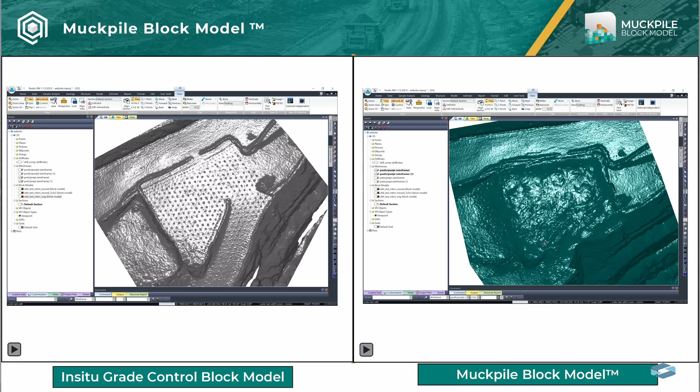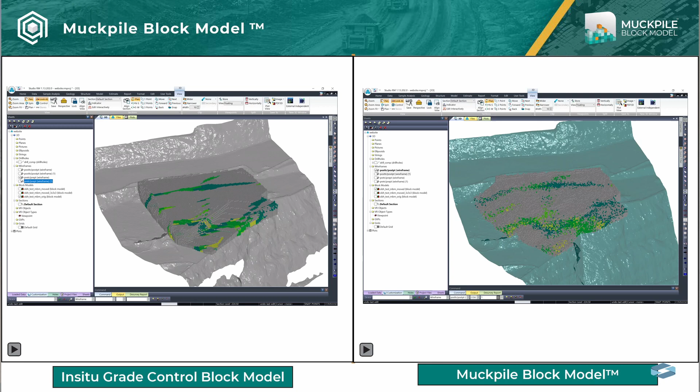If that's not immediately apparent what it is, you can see we've got two surfaces that we use. One of the pre-blast, which is the video playing now, and we use that pre-blast surface to slice your grade control model. So that slice of the grade control model, you can see, becomes a nice little basis of your grade control platform, and we subcell that to a cubic meter scale. So the surface of the post-blast arena, now you can see, also has a block model that fits perfectly to it, but none of those blocks are new. Every block in that post-blast Muckpile block model has come from your in-situ grade control model.

All our solution does is relocate cubic meter blocks in space. So you have a flawless balance of tons and grade in the Muckpile block model to what you had in situ. And because it's based on the surfaces, it's actually a very accurate volume estimation, shaving away 1% errors every place that we can. And as you can see in the last graphic, the Muckpile block model at a cubic meter resolution was too much precision to mine from. So we have reblocked that up into an SMU scale.

So it was really interesting, Dave Berry, talking about your Python functions. We would love a ton grade analysis here of not only what you had before the blast, so you can see the plan, but because the Muckpile block model helps you understand dilution, doing a grade tonnage curve and comparing the two curves is a really insightful activity that we do quite often. And the reblocking is a Python function we could look at open sourcing for you, seeing as you're missing that in your library. So with a quick introduction to the Muckpile block model, I'd love to hand over to Cael, our product owner, to walk you through a value application.

There you go, Cael. Excellent. Thanks for the layup, Bryce. That was a good introduction.

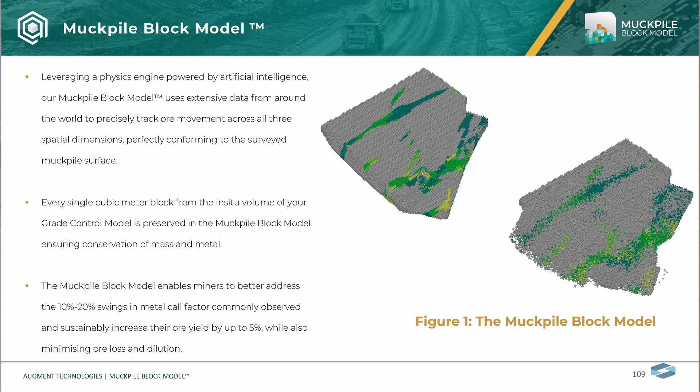So what this allows miners to do is to better address the 10 to 20% swings in metal call factor that we see when we do a reconciliation study. You often see a bit of a sawtooth sort of pattern. It's probably the topic for another talk, but there are many error bars in a reconciliation study that I'm sure we can all appreciate. But one of them is definitely ore loss and dilution, of course.

And so using the Muckpile Block Model enables our customers to realise an increase of ore yield by up to 5% sustainably, while also minimising the short-term variations in reconciliation.

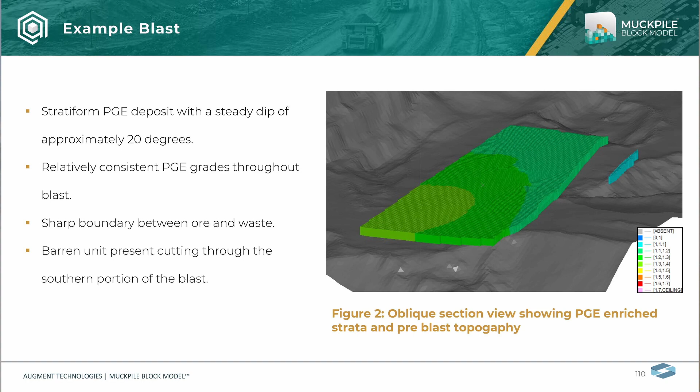So let's jump into the blast. We've got here a stratiform PGE deposit with a steady dip of approximately 20 degrees or so. Here I've just got the block model. It's the in-situ model that's been filtered to remove the waste. And you can see that there's relatively consistent PGE grades throughout. This particular part of the mine's high grade, and so essentially all the blocks here sit in the high grade material type. And there's a sharp boundary between the ore and waste, of course, for this type of deposit. This is a visual deposit, so you can see it in the pit.

And the next step of the process is to import our drill and blast data. And so what we're looking at here is a simple square pattern with echelon blast timing. We have a consistent drill spacing and burden. There's a few more holes on the free face, but what we're actually displaying here is the timing values.

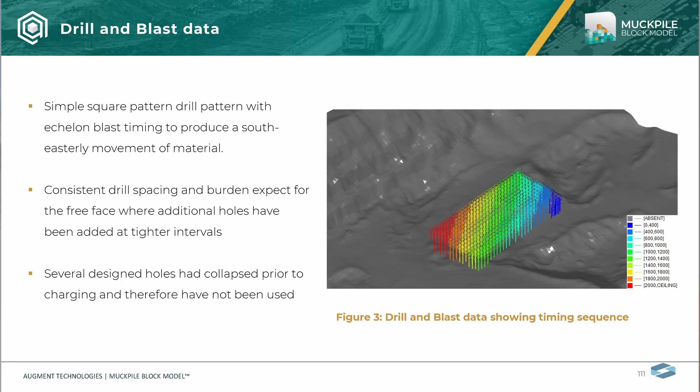And I find this is a really intuitive way of trying to set the expectations in your mind of what the blast movement's going to be like, because we know that blast movement happens at a right angle to our timing contours. And so we've got low timing values on the right, high timing values on the left. So we would expect blast movement to go from the left to the right-hand side of the screen.

Importantly, as I mentioned earlier, with regard to actuals, we do have several designed holes that have collapsed in this blast. So I just wanted to underscore the importance of using actuals, because it will have a demonstrable effect on the Muckpile Block Model at the end.

So we've just imported all the data, the user's created the strings, and the regularization process has happened. It's been sent to the cloud and returned. On a blast of this particular size, that process should take somewhere around 15 to 20 minutes. It does scale with the size of the blast.

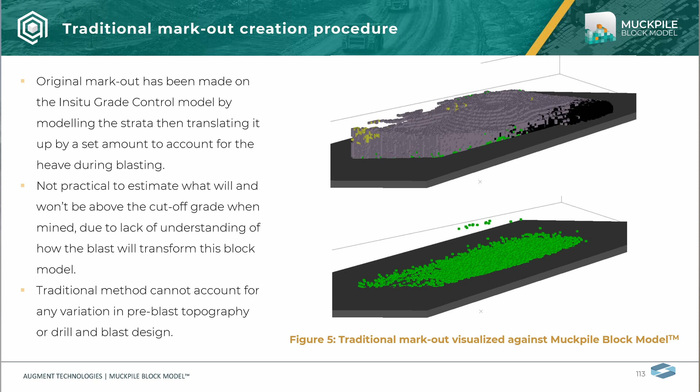But you can see that we've got some material that's hanging out on top of the markout there. And you'll also note that that material has a topography of its own. It has like a post-blast ore topography, if you will. And it's quite complex. If only we had some way of measuring it. Well, like I mentioned, it is a visual ore body, so we can send ore spotters into the pit and we can have a look at what the post-blast environment looks like.

And that's where the problem comes in for this kind of ore body geometry: how do you create a markout around that kind of geometry? But before we go there, we've got some ore spotting data. How does that compare to the Muckpile Block Model? And does the Muckpile Block Model represent that same complexity that I was saying is causing so many issues?

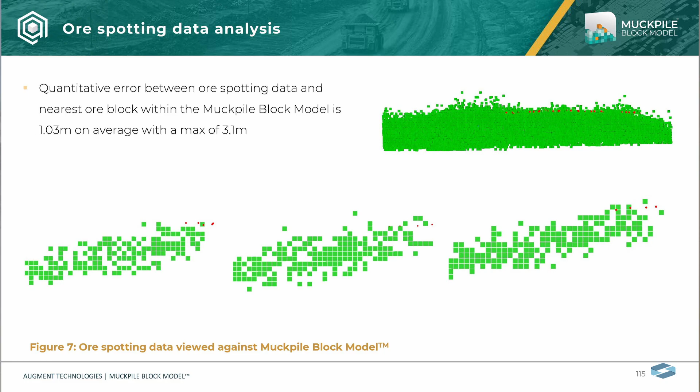And you can see for the parts where we do have those samples, there is generally a good agreement. You do find a block here or there that is above, and you do find a block here or there that is below. But in general, if we take a quantitative approach, which is always the best, we have approximately a 1 meter error on average between our ore spotting data and the nearest ore block as calculated by the Muckpile Block Model. And there is a max error of about 3 meters. But generally, we would consider that to be a good agreement between the two data sets.

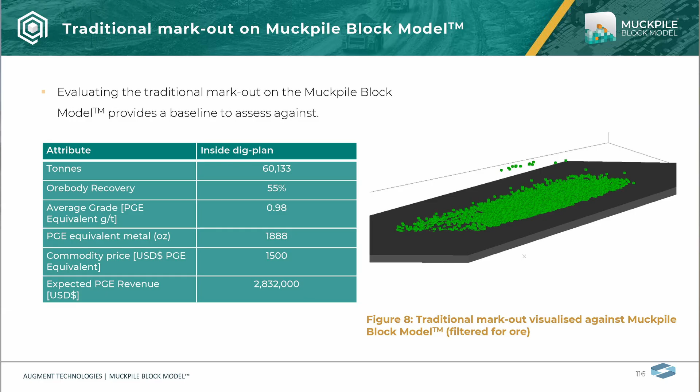So now that we've got our Muckpile Block Model, we can evaluate the traditional markout and see how much of that blast, which effectively all sat in the high-grade bin to begin with, has been recovered in that markout process. And in this instance, using the traditional one, we have approximately 55% of that ore being caught in that markout, which still gives us a very healthy revenue figure that's going to be brought forward immediately, because we all know that high grade makes its way to the mill first. But we are still leaving a lot on the table.

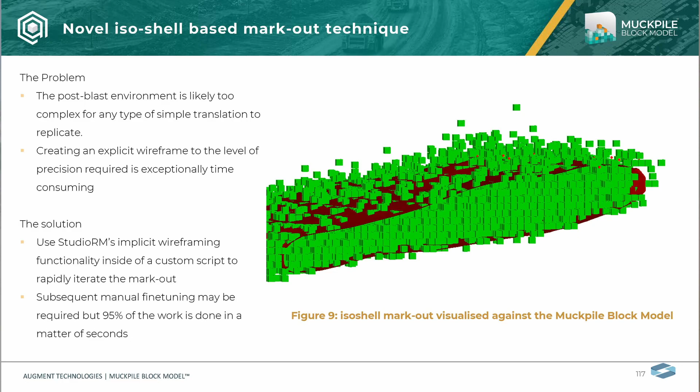But as we've already sort of mentioned, there's a complexity to this system that is really hard to capture with just any sort of simple translation of a wireframe or indeed a string. The ore body geometry is quite difficult to replicate. So what can we do that's different? We decided that we'd try a novel isoshell markout technique. So just to reiterate the problem, creating an explicit wireframe to this level of detail would be exceptionally time consuming and not a real good use of a geologist's time.

So the solution that we came up with, as I mentioned, is to run StudioRM's implicit wireframing functionality inside of a custom script that we created, which enables the user or the geologist to rapidly iterate the parameters that get input into that wireframing process to evaluate the tons and grade in each of those scenarios. So if you needed to put the most amount of tons through the mill at a given grade, like a cutoff, you could evaluate that scenario. Or if you were tons constrained and you needed to have the highest grade possible given a set amount of tons that you could put through the mill, you could evaluate that scenario.

Using the Muckpile Block Model in this way gives you the optionality to essentially evaluate whatever paradigm you're in. And also, it's critical that this process is only really possible because it is in a block model where you can store these values as points and wrap an implicit wireframe around it. So it's very powerful to have it in proper block model format. Now, subsequent manual wireframing and fine-tuning is probably required, but you've eliminated 95% of the legwork, and what would probably take upwards of an hour to do explicitly, you've taken down to a matter of seconds.

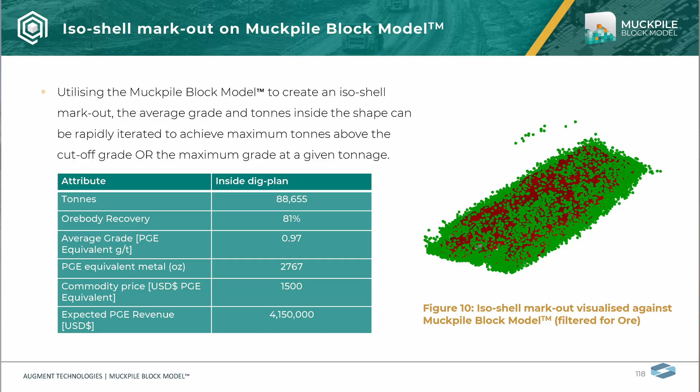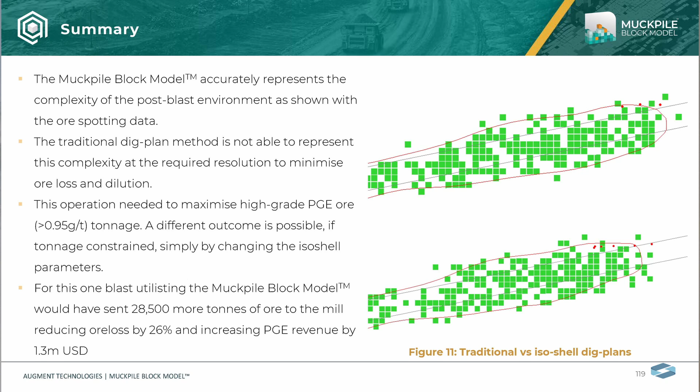So I'm just going to summarize a few of those points again in case I went over them too quickly. So the Muckpile Block Model accurately represents the complexity of the post-blast environment to a precision that was not possible previously. The traditional markout method that we saw is not able to represent that complexity, and indeed almost any simple translation would not be able to do the job adequately. And any explicit wireframing done by a geologist would take a long, long time.

So this isoshell method is considered fit for purpose for them with the manual tweaking, as I mentioned, that's required. And also the isoshell conforms quite well to the ore spotting, as you'll note, between the red being the isoshells and the red dots being the ore spotting. So like I said, this operation needed to maximize tons, and that's what we've been able to do.

So for this one blast, we would have sent approximately just a bit over 28,000 tons to the mill in that high grade material type, increasing the recovery by 26% in that material type, and therefore increasing revenue by approximately $1.3 million US.

If you were asked what would be the key differentiator, say, between this software and Orica's OrePro 3D? There are multiple use cases. So one of the ones that we found to be particularly useful with this is quantifying rill. And that's a use case that I'm not sure anyone else can do.

So we have our customers that inevitably blast over the pit wall and lose some ore during that process, but it's been very difficult in the past to quantify that component. We have customers now that maintain their Muckpile Block Models and effectively have a stockpile at the bottom of the pit which they've quantified and can use our product effectively in that instance.